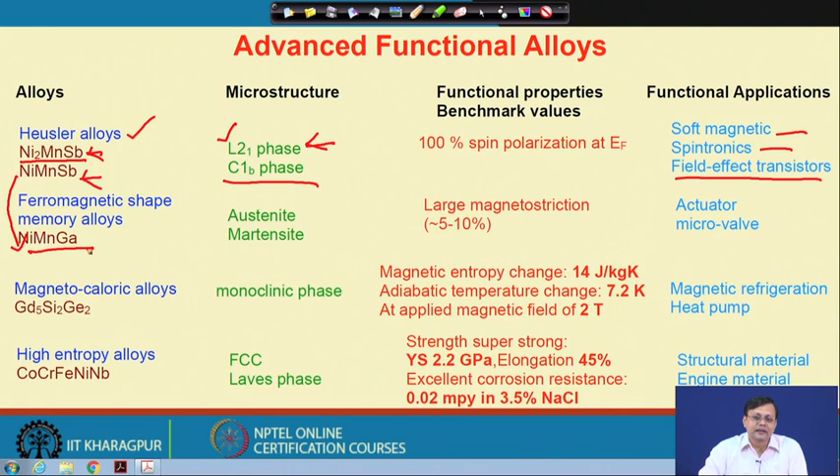Now, very similar alloys here, this is also a half Heusler. However, in this particular case, we can get shape memory behavior. On one hand they have ferromagnetic properties, and only ferromagnetic materials can heavily interact with the magnetic field. So, because they are ferromagnetic, by application of the magnetic field there will be a phase transition between austenite and martensite or vice versa, and we can get a very large shape change, dimensional change, or length change. The property is called magnetostriction. It is very high, greater than 5 to 10%, and these materials are already being used as actuators, micro valves and so on.

Now, the third type of material is also magnetic. In those magnetic alloys, as an example, we may have some monoclinic type of structures. This is a gadolinium compound, gadolinium silicon germanium. The interesting phenomenon here is that by application of a magnetic field in the range of 2 Tesla, we can achieve a large magnetic entropy change on the order of 10-14 joule per kg Kelvin, and that changes the adiabatic temperature of the material on the order of 7.2 Kelvin.

This is a very fascinating class of material, and the benefit is enormous, because we can develop a Carnot cycle where on one side we generate a hot side, and the other side is a cold side. So, we can extract that heat or we can cool a material. Because of that, we use this material for magnetic refrigeration or in heat pumps. So, the Carnot cycle can be used both ways, and we will discuss the major benefits of such materials later on.

Now, another class of materials is high entropy alloys. These are multi principal element alloys like cobalt, chromium, iron, nickel. So, 25 atomic percent cobalt, 25 atomic percent chromium, 25 atomic percent iron, and 25 atomic percent nickel can be mixed in the liquid state, and we can produce an alloy out of these 4 major elements, and we will get a single FCC phase.

And that may have some strength level of 800 or below 1000, which can be further processed to make very nano crystalline size microstructure, or maybe by adding some niobium into these alloys with these 4 principal elements, we can incorporate some Laves phase, or Laves phase may form due to the addition of niobium, and the yield strength can reach up to 2.2 gigapascal.

So, this strength level is almost reaching close to the theoretical strength like metallic glasses, and we can also achieve very high elongation, very high corrosion resistance in an aqueous medium, let us say 3.5% of sodium chloride. And these are typical alloys where, due to the presence of various equiatomic alloying elements, the entropy, meaning configurational entropy S = k ln W, can achieve very high values, and the material could be multifunctional.

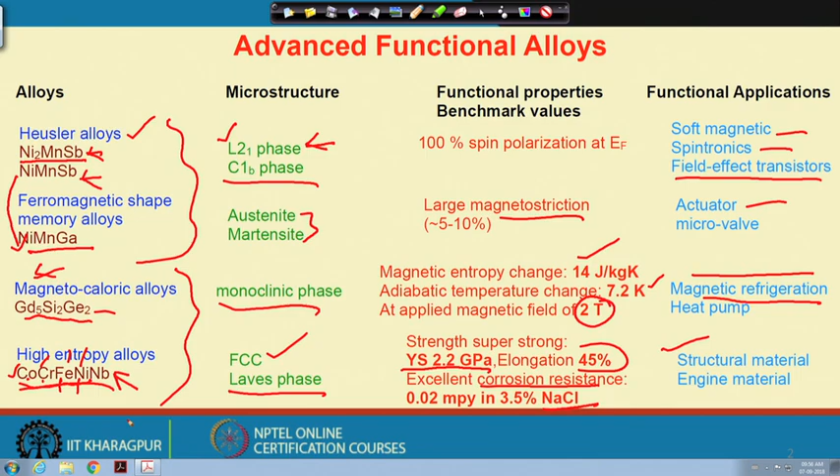So, in those cases the material can be used as a structural material, or maybe due to different heat conductivity we can also use it for engine blocks and so on. The first 2 different types of magnetic materials already find commercial application. However, the magnetocaloric alloys for refrigeration purposes and high entropy alloys are still yet to be developed, and there are many different considerations and theoretical understanding being developed day by day.

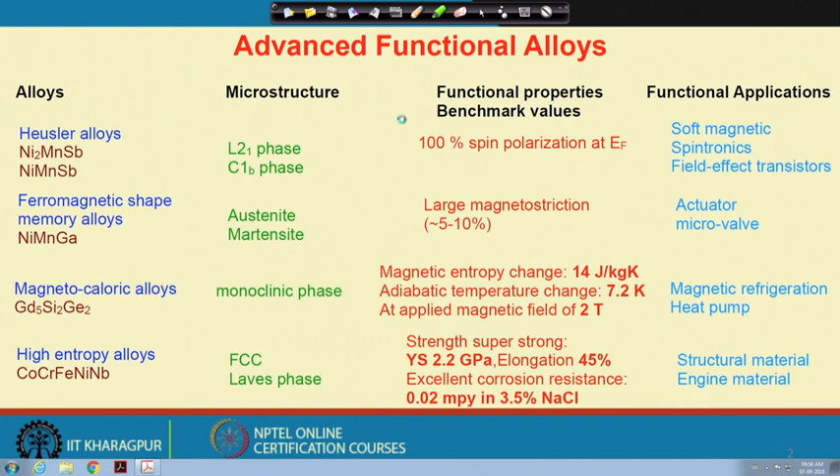Now, before going to these Heusler alloys, Heusler compounds, we first need to discuss a bit about the half metallic ferromagnetics. Here I specifically used this terminology magnetics. It includes different oxide compounds, perovskite structures, zinc blende structures like gallium arsenide, or alloys. So, in these half metallic ferromagnetics, the majority spin, spin up, band is metallic, while the minority spin, spin down, band is semiconducting in nature. What spin up and spin down metallic or semiconducting really means, we will discuss in a minute. This basically leads to a complete spin polarization at the Fermi level.

There are 4 types of half metallic ferromagnetics that have been observed: oxide compounds with rutile and spinel structures, perovskites, zinc blende like gallium arsenide, and Heusler compounds. Among all these, Heusler alloys hold the greatest potential to realize half metallicity at room temperature due to their lattice constant matching with III-V semiconductors and large band gap at the Fermi level. Now, these Heusler compounds have an FCC based structure, and let us first look at how these structures look.

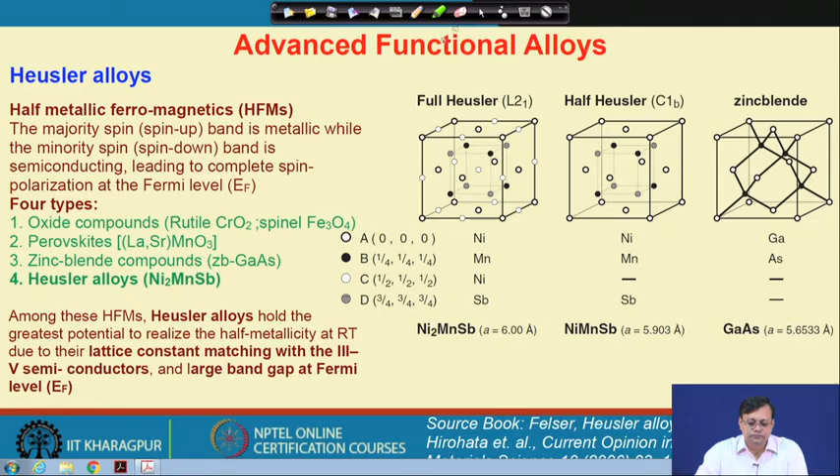Now, what do we mean by this Fermi level? There is a band gap, the forbidden energy gap, that exists between the conduction and the valence band. In a metal, there is almost no gap, so electrons can flow from the valence to the conduction band, and enough electrons are present in the conduction band, so we get good electrical as well as thermal conductivity. In a semimetal, the conduction band and valence band overlap, so electrons can easily go to either band. In a semiconductor, there is a larger energy gap between the conduction band and valence band, whereas in an insulator it is much higher, greater than 4 eV.

So, the gap is much higher. So almost no electron can jump into the conduction band normally, and the energy required is very high. So, this is the difference between the metal, semi metal, semiconductor and insulator. Now, the density of states in a band gap is 0, like in case of a metal, and however, we generally refer to this forbidden energy range between the conduction band and the valence band.

So, in case of full Heusler and the half Heusler or semi Heusler, the structure is different, because even though both are FCC based structures, in one case it is the L2 1 structure, and here in the C1b structure, the centering atoms are missing actually.

And so, in both these cases, the presence of these X2YZ type of elements, X and Y are taken from the periodic table, which are the transition metals, like here Y is titanium, vanadium, chromium, manganese, zirconium, niobium, hafnium, tantalum, and so on, whereas X here is represented by iron, cobalt, nickel and so on. So, we can take nickel or iron; there are many iron based compounds also being developed.

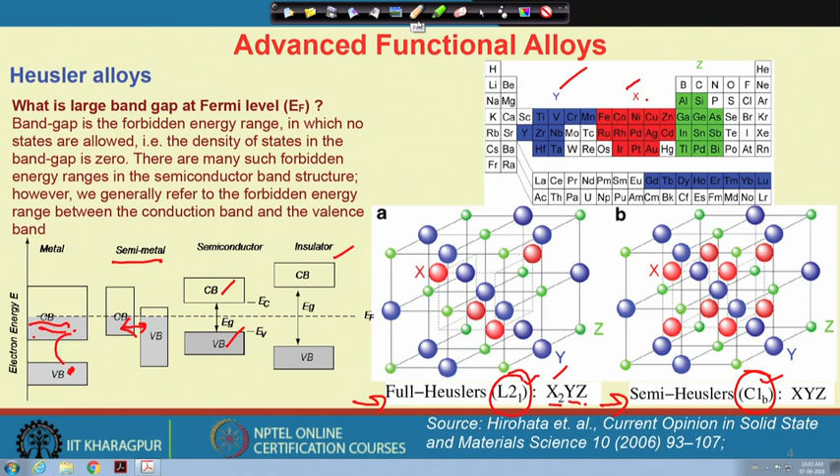Now, these are the p type of elements like aluminum, silicon, gallium, germanium, arsenic, antimony, tin and indium. So, these are the p type metals taken from the periodic table. So, that is basically represented by the Z, and we can clearly see the difference between these two structures, and try to look at the other differences in this full Heusler type of alloy and half or semi Heusler type

of compound. So, in case of full Heusler, we have basically 4 FCC sublattices. Okay. So, like A, B, C and D positions, which are all occupied in the full Heusler, as I said, and in case of the semi Heusler compound, we leave one of the 4 sublattices, and that is basically the C, and here there is absence of nickel or iron and so on.

So, half metallic alloys show large potential for spintronics and magneto electronics, and for these half Heusler alloys, typical examples are nickel manganese indium or nickel manganese tin or nickel iron gallium, cobalt nickel gallium or cobalt manganese silicon. So, you can easily see how these semi metal or p type elements have been chosen from the periodic table actually,

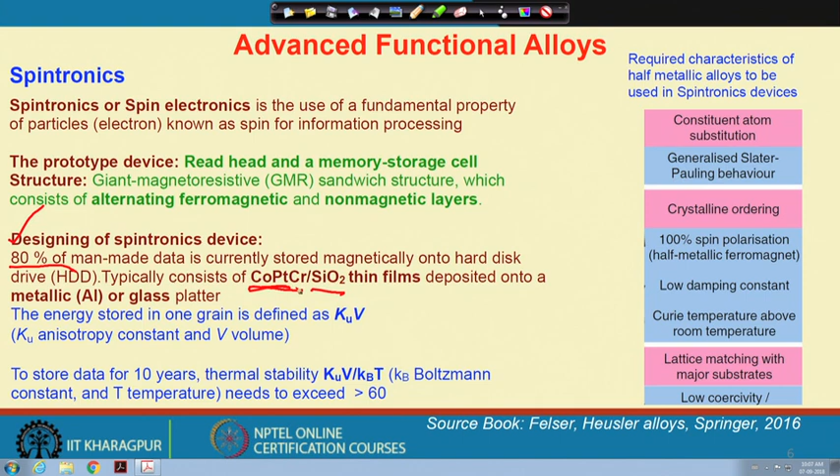So, as an example, we discussed cobalt platinum for magnetic storage. You may recall this is a cobalt platinum chromium alloy and a silicon dioxide thin film, which are sandwich type structures made for those spintronics applications. So far, with such a design, 80% of the man made data today is stored magnetically in the hard disk drive, and typically they all consist of these cobalt platinum chromium and silicon dioxide thin films, usually deposited on a metallic aluminum or glass platter.

The important information here that we must keep in mind is that the energy stored in one grain is defined by Ku into V. V here is the volume and Ku is the anisotropy constant. So, the magnetic anisotropy is generated due to the crystallographic direction. You may recall we have shown you the hysteresis. So, let us say for a particular HKL direction here, and this is another direction.

So, this is the applied magnetic field, let us say this is H, and here we have B or M, magnetization. So, for this particular direction HKL we can magnetize the material at a much lower field, whereas for this particular HKL we cannot, or we need a much higher applied magnetic field to magnetize the magnetic material. So, this basically generates an anisotropy in the material.

So, this is an area that is linked with the anisotropy, and we call it Ku. Ku is the anisotropy constant, and to store data for, let us say, 10 years, thermal stability is very important, and it needs to exceed 60, which comes from the ratio of KuV divided by kB T, where kB is the Boltzmann constant at a given temperature. So, that is why one needs to consider all these aspects for spintronics applications.

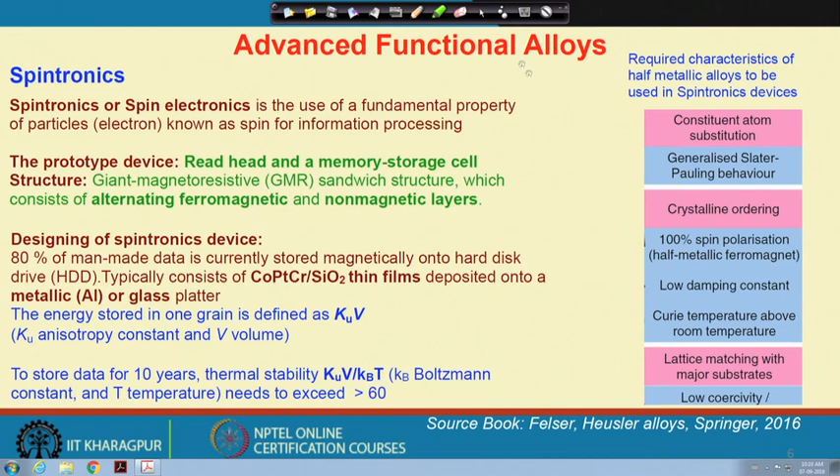Now, regarding spin polarization, it is measured with a parameter called P, and P is equal to the difference between spin up and spin down, divided by the sum of these two different spins, spin up and spin down. So, if we need, let us say, 80% spin polarization, then I basically need 90-10: 90% of the spins should be up, 10% down. So, 80 will be the difference divided by 100. So, the calculation goes that way.

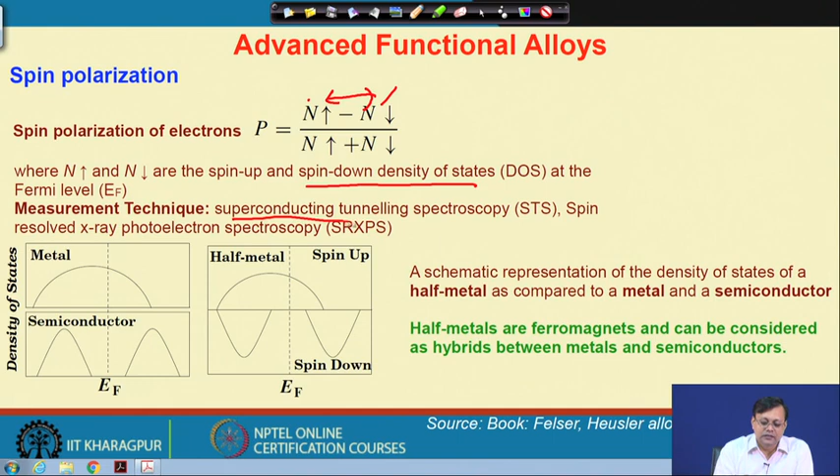Spin up and spin down are represented by the density of states at the Fermi level, and measurement techniques we employ include superconducting tunneling spectroscopy or spin resolved X-ray photoelectron spectroscopy. To understand the density of states: in case of a metal, near the Fermi level the valence band and conduction band are present and electrons can easily flow, and a half metal partly has this metallic nature. Why we call it a half metal you will understand, because in case of a semiconductor we have the conduction band and the valence band with a large energy gap between these two.

So, the features of a metal and of a semiconductor are both present in a half metal, because for spin up it is metallic, while for spin down it is like a semiconductor. So, this is the Fermi level. Half of the property is like a metal, and when it is spin down it is like a semiconductor. So, this is the basic origin of the spin polarization effect in half metallic metals, or p type elements. So, this is the schematic representation of the density of states of a half metal compared with a metal and a semiconductor. So, half metallic ferromagnets can be considered a hybrid between a metal and a semiconductor.

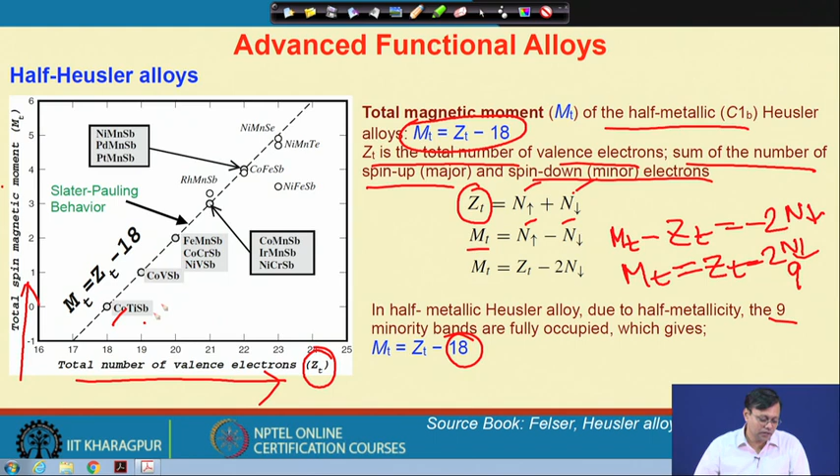So, now M_t is equal to Z_t minus 2n, and this n is the spin down one. For a half metallic alloy, due to the half metallicity, let us say 9 minority bands are occupied, and if I put 9 here, the total is 18. So, this is the basic origin of all these half Heusler compounds, and how these spin magnetic moments are achieved due to half metallicity in a compound.

However, the switching between the half Heusler phase and the Heusler phase we can identify by considering the formation of some point defect. This is quite simple, because I have shown you that the C sublattice is missing in a half Heusler phase, and there is a structural vacancy. So, TiNiSn is a half Heusler compound, and TiNi2Sn is a Heusler type compound. In this case you can see there are some structural vacancies present to switch from a half Heusler to a Heusler.

So, we need nickel antisites, where nickel in the HH swaps with the structural vacancy, causing nickel antisites where we have some excess nickel and so on. So, transformation from a half Heusler to Heusler is also possible. They change their positions via a vacancy defect, from a half Heusler HH to a Heusler phase.

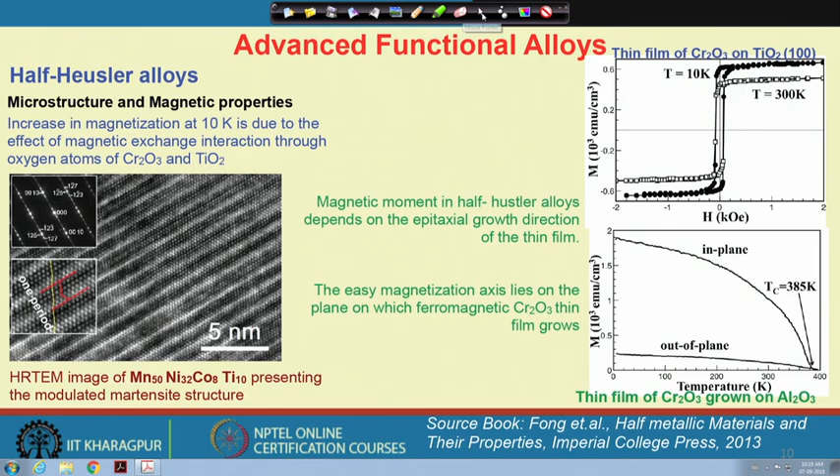So, with this we stop today's discussion on these half Heusler type compounds. We will continue this discussion in the next class in more detail, with very interesting features of other functional properties, including some of the magnetic properties.